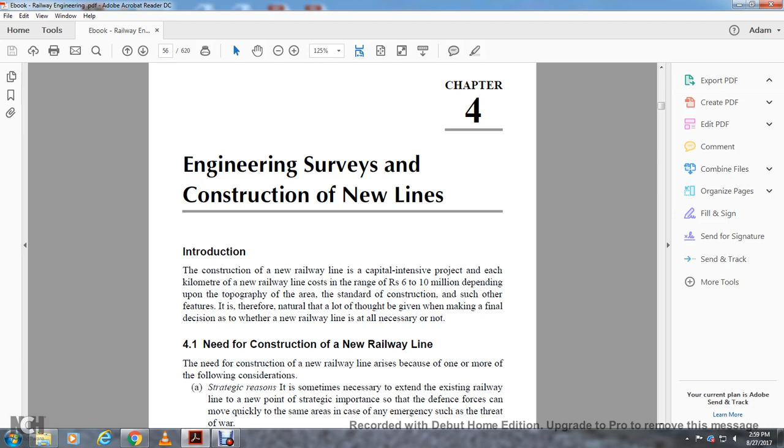All right, Chapter 4, Engineering Surveys and the Construction of New Lines. Introduction. The construction of a new railway line is capital intensive. The project cost per kilometer of new railway lines is in the range of 6 to 10 million, depending on the topographical area, the standard of construction, and other features. Therefore, a thorough study should be made before the final decision on whether the new railway line is necessary or not.

Need for the construction of a new railway line. The need for the construction of a new railway line arises because of one or more of the following considerations. Strategic reasons: sometimes it's necessary to extend the existing railway line to new points of strategic importance so the defense forces can move quickly to that area in case of emergency, such as the threat of war. Political reasons: a new line sometimes becomes necessary to serve the political needs of the country, for example, the Pathankot–Jammu railway line.

Developing backward areas: sometimes the construction develops backward areas, as experience has shown that backward areas with railway communication available always develop very fast. The Assam railway link can be classified in this category. To connect new trade centers: some new trade centers are connected with railway lines to quicken the transportation of goods from the point of production to the point of consumption.

Shortening of existing railway links: the existing routes between two important points may be longer, so new railway lines are constructed on the shorter line. In such a case, the short route is not only economical but also helps with the faster movement of goods and passengers. The Konkan Railway is a typical example.

Doubling of the existing single railway line has been done in a few cases to meet the additional requirement of traffic. Recently, a large number of projects have also been undertaken for converting existing meter gauge sections into broad gauge lines in order to have a uniform gauge for the smooth flow of traffic.

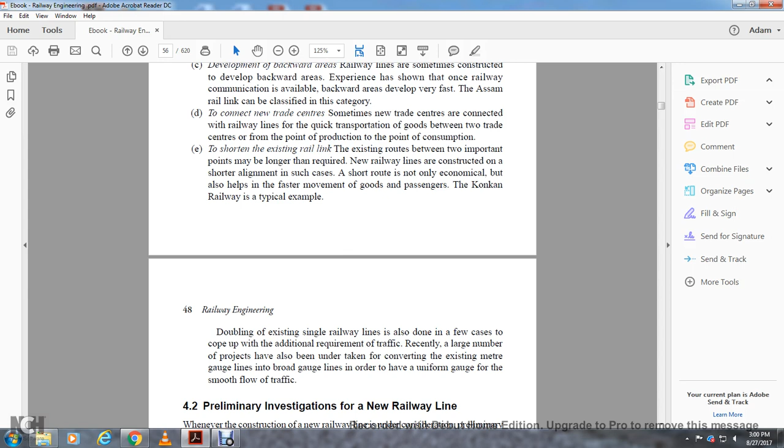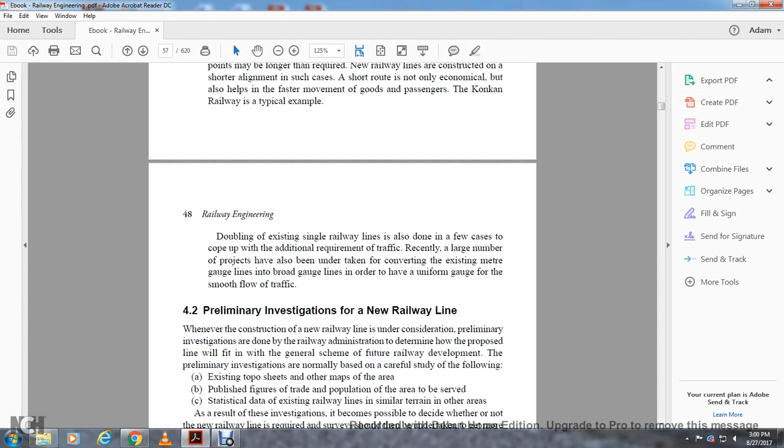4.2, the preliminary investigation of a new railway line. Whenever the construction of a new railway line is under consideration, a preliminary investigation is done by the railway administration to determine how the proposed line will fit in the general scheme of future railway development. The preliminary investigation is normally based on a careful study of existing topo sheets, other maps of the area, the published figures of trade and population of the area to be served, the statistical data of existing railway lines, and similar terrain in other areas. As a result of these investigations it becomes possible to decide whether or not the new railway line is required and what surveys should be undertaken to get more detail.

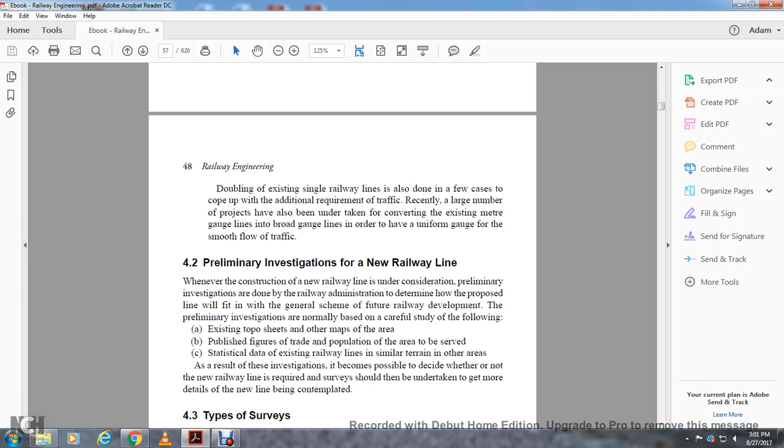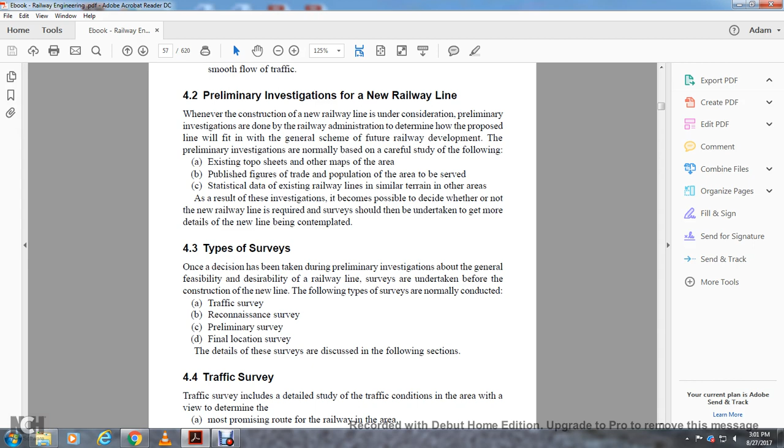4.3, types of surveys. One of the decisions taken during the preliminary investigation is about the general feasibility and desirability of the railway line, and the surveys to be undertaken before the construction of the new line. The following types of surveys are normally conducted: traffic survey, reconnaissance survey, preliminary survey, and final location survey. The details of these surveys are discussed in the following section.

4.4, the traffic survey. The traffic survey includes the details of the traffic conditions in the area with a view to determine the most promising route for the railway in the area, the possible traffic the railway line will carry, and the standard of the railway line to be followed. Traffic surveys are normally undertaken in conjunction with the reconnaissance and preliminary engineering surveys, so the technical feasibility, relative costs, and alternate proposals can be formulated.

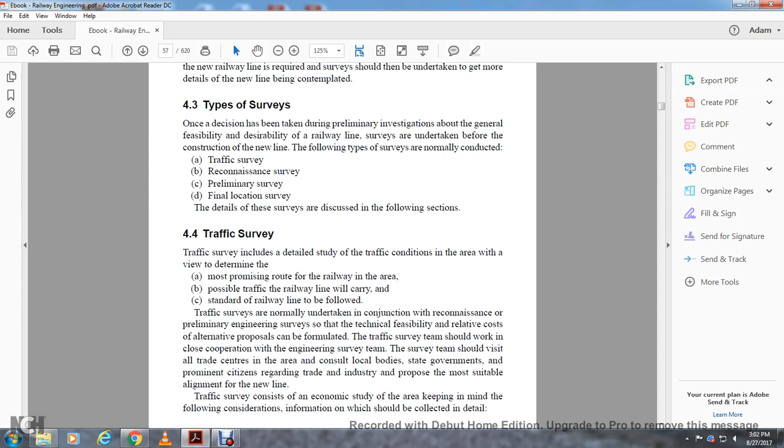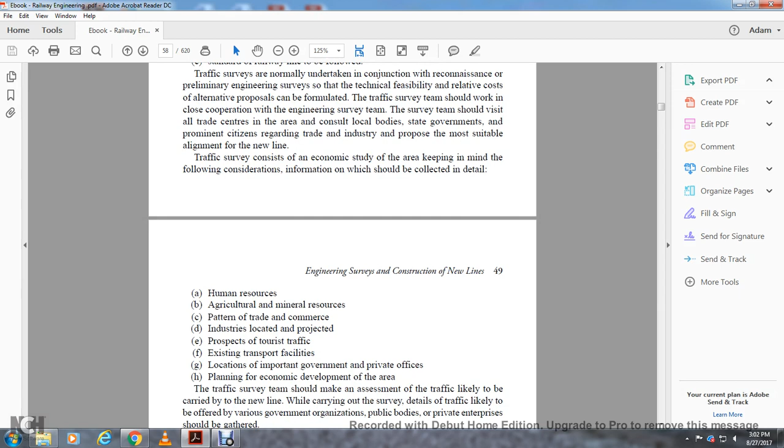The traffic survey team should work in close cooperation with the engineering survey team. The survey team should review all trade centers in the area and consult local bodies, the government, and prominent citizens regarding trade and industry and the most suitable alignment for the new line. The traffic survey consists of an economic study keeping in mind the following considerations, information on which will be collected in detail: human resources, agricultural and mineral resources, trade, commerce, and industry located in the project area, prospects of traffic, tourist traffic, existing transportation facilities, the location of important government and private offices, and planning for economic development of the area.

The traffic survey should make an assessment of the traffic likely to be carried by the new line. While carrying out the survey, details of the traffic likely to be offered by various government organizations, public bodies, and private enterprises should be gathered. At the end of the survey, a report should be formulated.

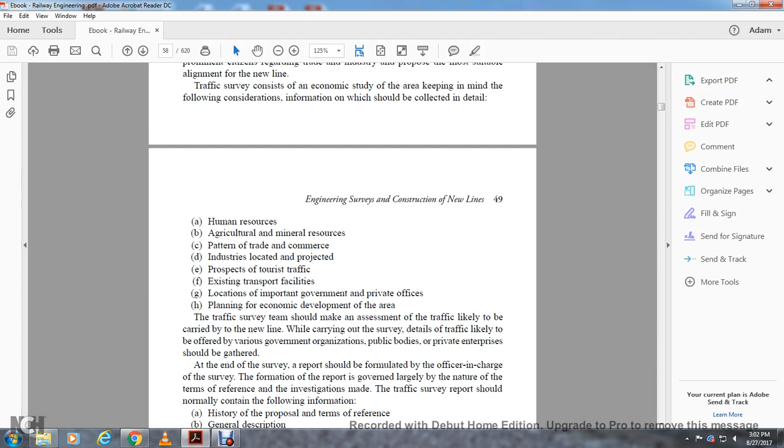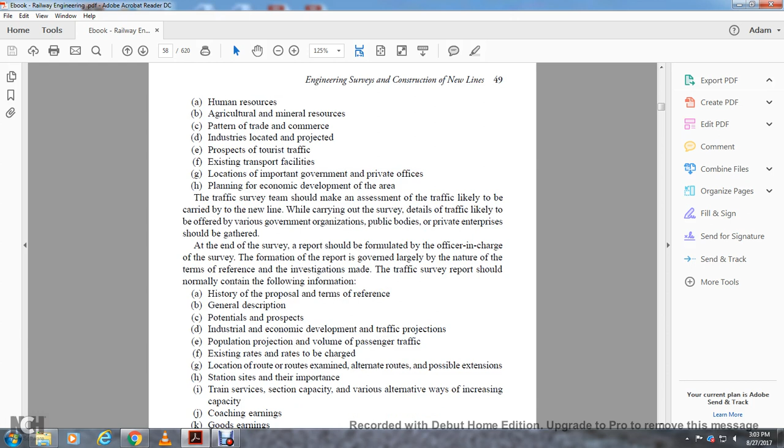The officer in charge for the formation of the report is governed largely by the nature of the terms of reference of the investigation made. The traffic survey report should normally contain the following information: history, proposed terms of reference, general description, potential prospects of industrial and economic development, traffic projections, population projection, volume of passenger traffic,

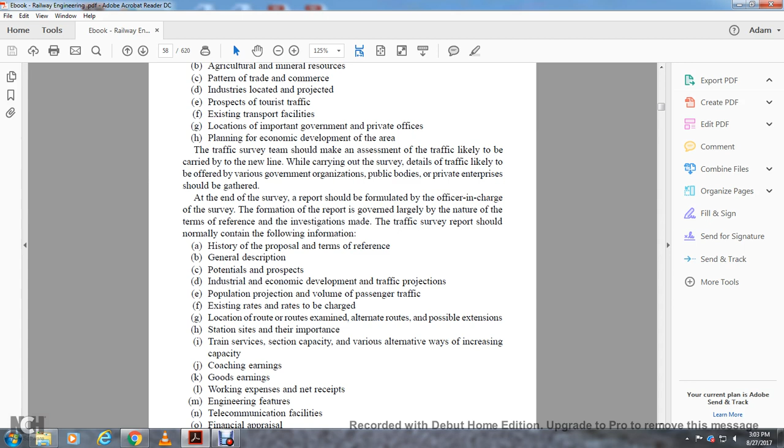existing rates and rates to be charged, location of the routes and routes examined, alternate routes and possible extensions, station sites, importance in the train services and section capacity, various alternative ways of increasing coaching earnings, goods earnings, working expenses, net receipts, engineering features, telecommunication facilities, financial appraisal, and the conclusion and recommendation.

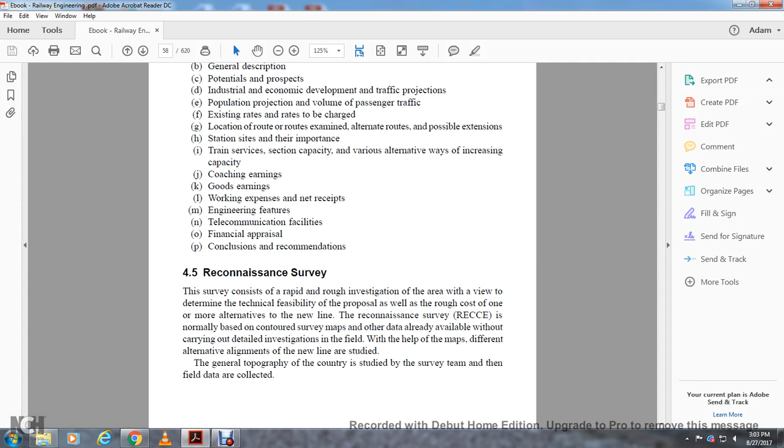Reconnaissance survey. This survey consists of a rapid investigation of the area with a view to determine the technical feasibility of the possible proposal, as well as a rough cost of one or more alternatives for the new line. The reconnaissance survey is normally based on the contour survey maps already available, without carrying out detailed investigation in the field. With the help of the map, the different alternative alignments of the new line are studied. The general topography of the country is studied, and the survey team collects the field data.

4.5.1 Survey instruments. The reconnaissance survey is mostly conducted using survey instruments rapidly measuring the approximate distances and heights. The survey instruments used are the following: the prismatic compass for the magnetic bearing of the proposed alignment, the aneroid barometer for the relative height of the various points, the Abney level and hand level, the clinometer for measuring gradients and angles of slope, binoculars for viewing physical features, and a pedometer to record the total length traveled while walking.

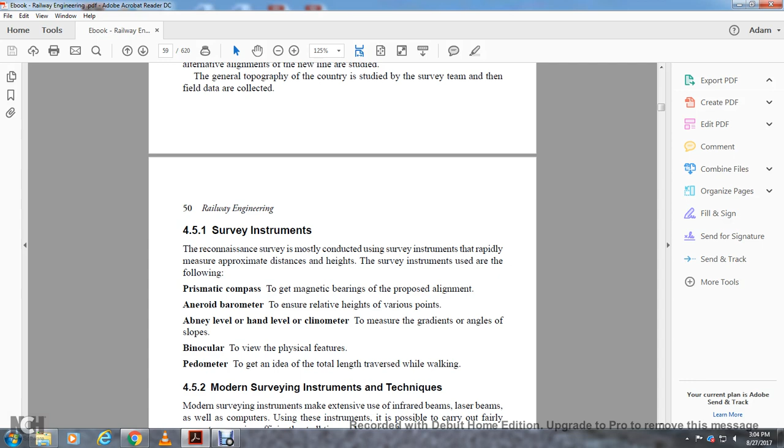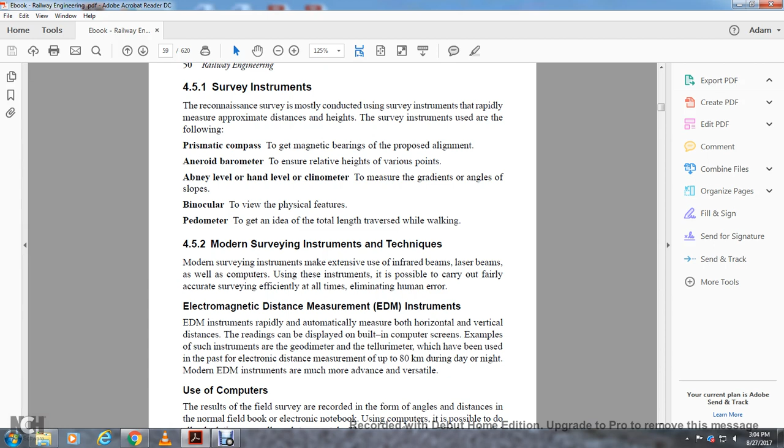4.5.2 Modern surveying instrument techniques. With modern survey instruments making use of infrared beams, laser beams, as well as computers, it is possible to carry out fairly accurate surveying efficiently at all times, eliminating human error. Electromagnetic distance measurement instrument. The EDM instrument rapidly and automatically measures both the horizontal and vertical distance, with readings displayed on the screen. Examples of such instruments are the geodimeter and the tellurometer, which have been used in the past, measuring distances up to 80 kilometers during the day and the night. Modern electromagnetic distance measurement is much more advanced and versatile.

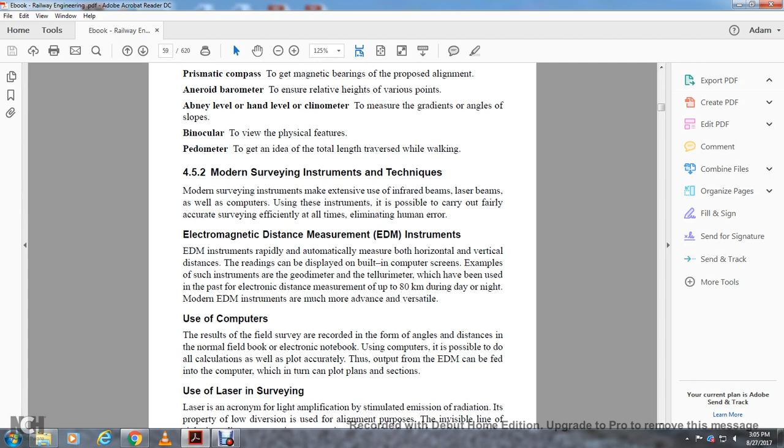Use of computers. The results of the field survey are recorded in the form of angles and distances in a normal field book or electronic notebook. Using computers, it is possible to do all the calculations as well as the plotting accurately. The output from the electronic distance measurement can be fed into the computer, which can then plot plans and sections.

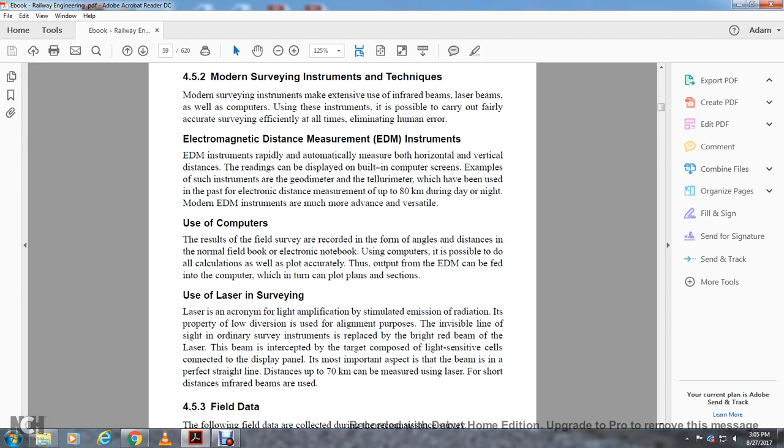Using lasers in survey. Laser is an acronym for light amplification by stimulated emission of radiation. Its property of low divergence is used for alignment purposes The invisible line of sight in the ordinary survey instrument is replaced with the bright red beam of the laser. The beam is intercepted by a target composed of light-sensitive cells connected with a display panel. The most important aspect of the beam is that it is a perfect straight line. Distances up to 70 kilometers can be measured using a laser; for short distances, infrared beams are used.

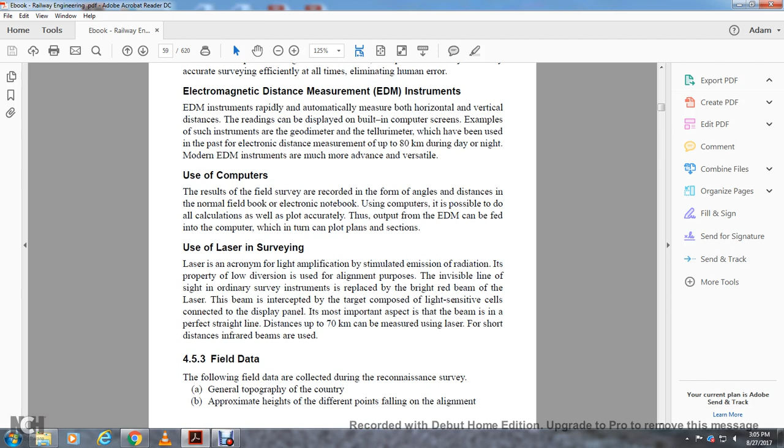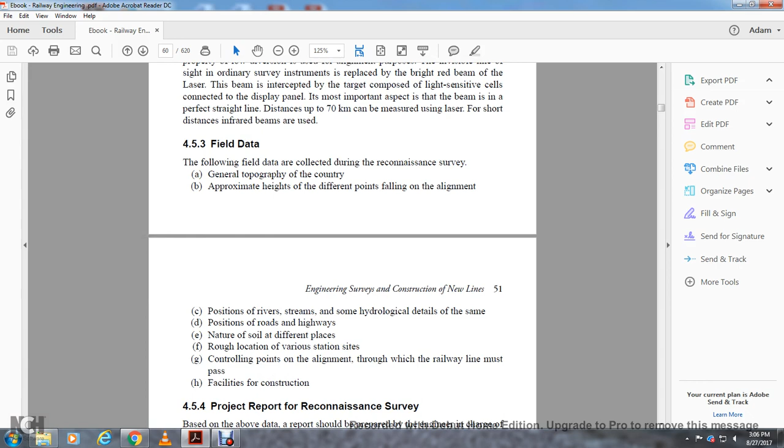4.5.4 The project report of the reconnaissance survey. Based on the above data, the report should be prepared by the engineer in charge of the project, bringing out clearly from the financial point of view whether or not the prospects of the alignment surveyed make it worthwhile to undertake further investigation to construct the line. The project report should be accompanied by an abstract estimate of the cost of the line. The report and estimate should be accompanied by a map of the area at a scale of 20 kilometers to 1 centimeter, and an index map of 2.5 kilometers to 1 centimeter.

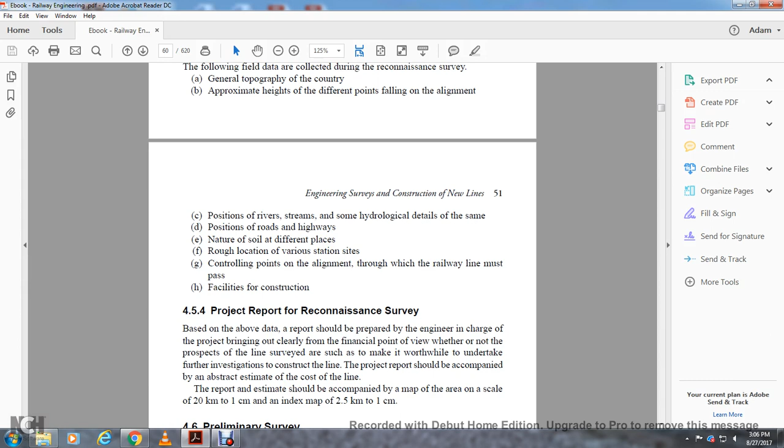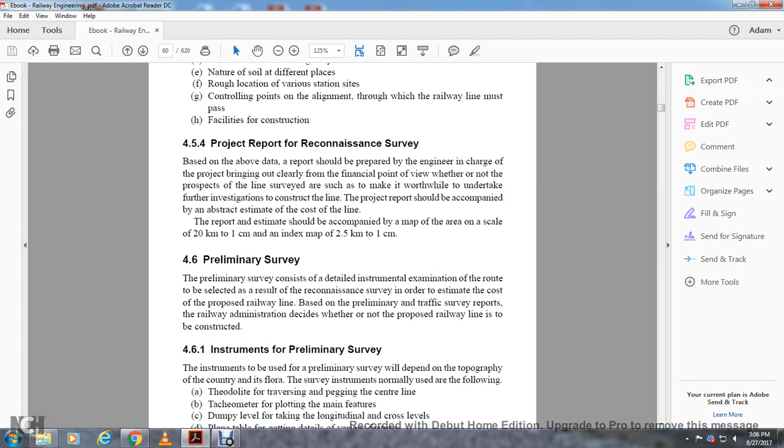The preliminary survey. The preliminary survey consists of a detailed examination of the route selected as a result of the reconnaissance survey, in order to estimate the cost of the proposed railway line. Based on the preliminary and traffic survey reports, the railway administration decides whether or not the proposed railway line is to be constructed.

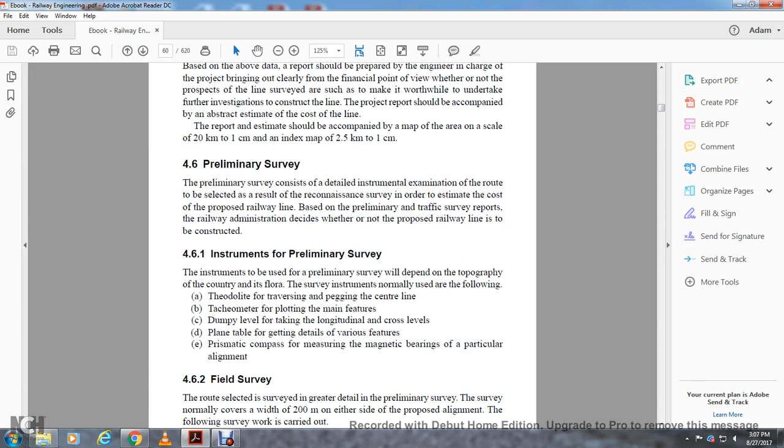4.6.1 Instruments for the preliminary survey. The instruments used for the preliminary survey depend on the topography of the country and its flora. The instruments normally used are the following: the theodolite for traversing and pegging the center line, the tacheometer for plotting the main features, the dumpy level for taking longitudinal and cross levels, the plane table for getting the details of various features, and the prismatic compass for measuring the magnetic bearing of a particular alignment.

4.6.2 The field survey: the route selected is surveyed in greater detail in the preliminary survey. The survey normally covers a width of 200 meters to either side of the proposed alignment. The following survey is carried out.

An open traverse is run along the center line of the proposed alignment with the help of a theodolite, tacheometer, or compass and chain, cross-leveling the proposed route within a width of 200 meters to either side, in order to make an accurate contour map.

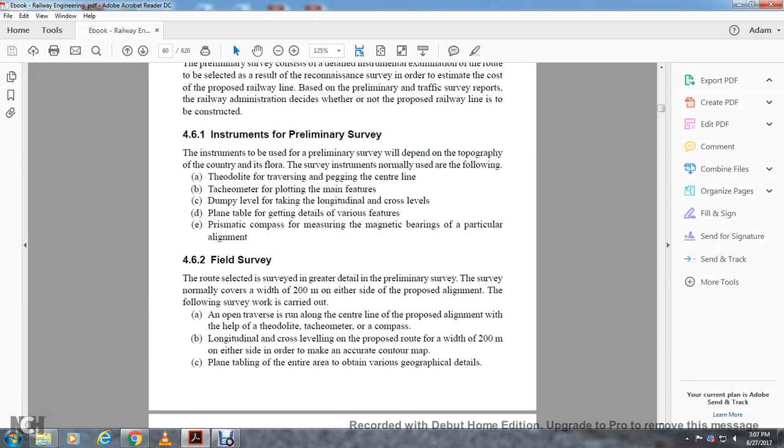Plane table the entire area to obtain the various geographical details. Special survey is done at station sites, level crossings, and bridges using a plane table.

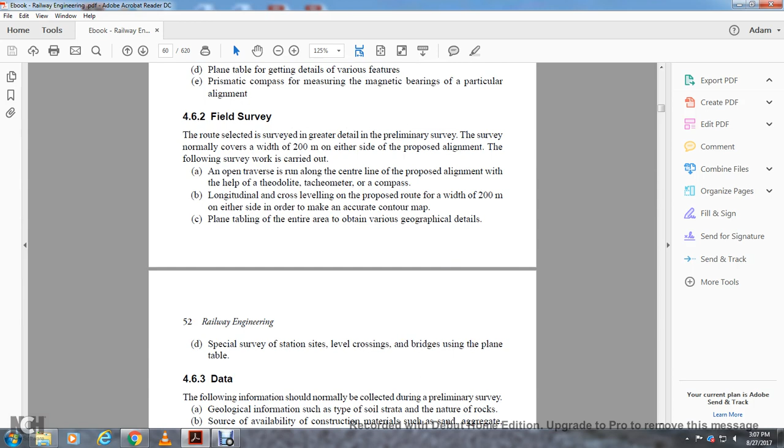463. The following information should normally be collected during the preliminary survey: geological information such as the type of soil and strata, the nature of the rock, source available for construction materials such as sand, aggregate, brick, cement, and timber, and facilities for construction such as availability of labor and drinking water.

Full details for the land and buildings required, details of existing bridges and culverts, along with information on proximity to tanks, bunds etc. which may affect the design of the bridge, and details of road crossings along with the angle of crossing.

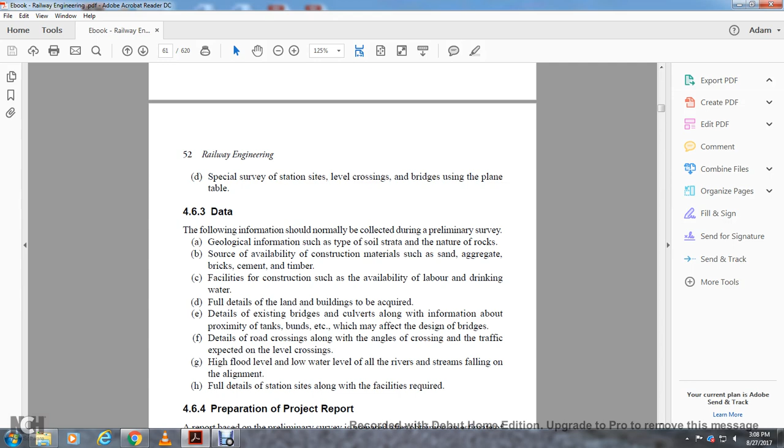Traffic expected on the level crossings, high flood level, low water level of all rivers, streams falling on the alignment and full details of stations along with facilities required.

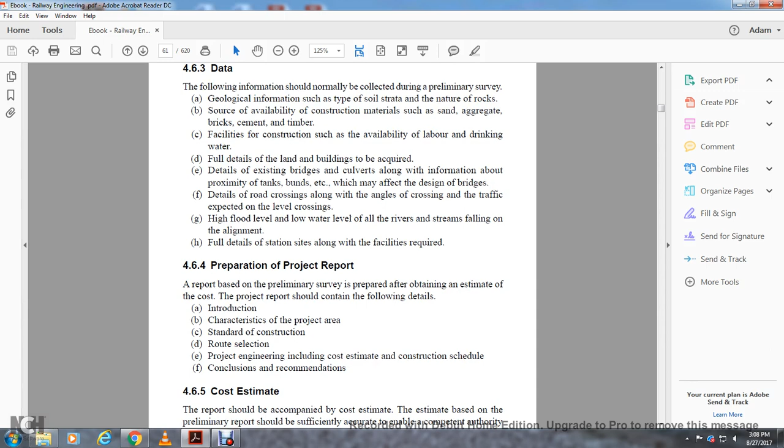464. Preparation of the project report. Reports of the preliminary survey, along with the estimate of cost, should contain the following details: introduction, characteristics of the project area, standard of construction, route selection, project engineering including cost estimate, construction schedule, and conclusion with recommendations.

465. Cost estimate. The report should be accompanied by a cost estimate based on the preliminary survey; this estimate should be sufficiently accurate to enable the competent authority to take a decision regarding construction of the new line.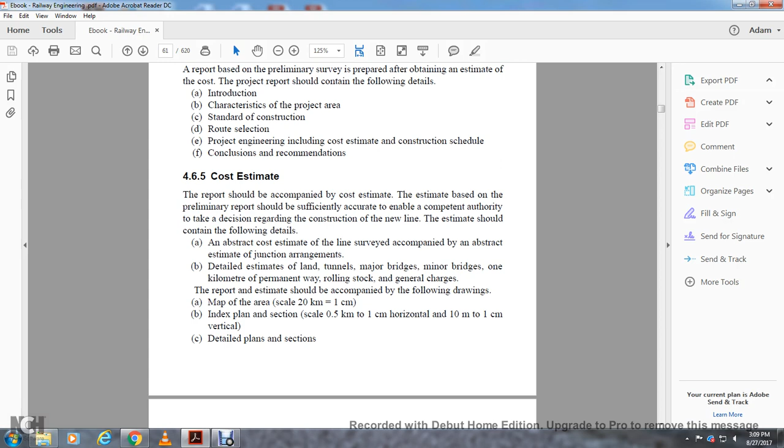The report and estimate should be accompanied by the following drawings: a map of the area at a scale of 20 kilometers to 1 centimeter, an index plan section at half a kilometer to 1 centimeter horizontal and 10 meters to 1 centimeter vertical, detailed plan sections, station yard plans, and junction arrangement plans.

Preliminary engineering cum traffic survey. Quite often the traffic survey and preliminary engineering survey are carried out simultaneously in order to expedite the project. In such cases, a techno-economic survey report is compiled based on the preliminary traffic surveys.

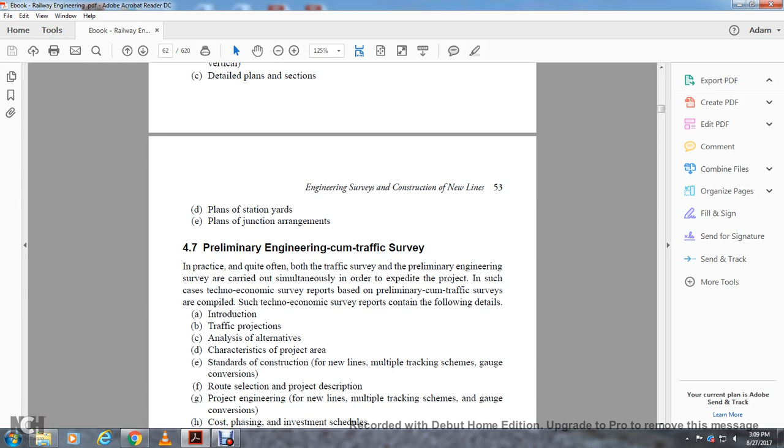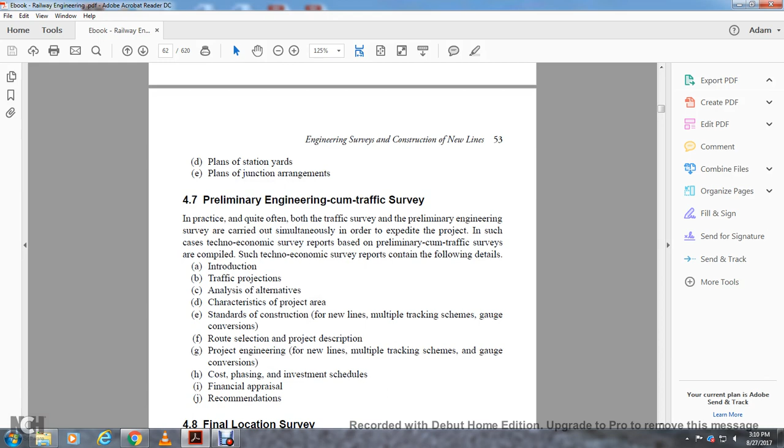Such techno-economic survey reports contain the following details: introduction, traffic projections, analysis of alternatives, character of the project area, standards of construction for new lines, multiple track schemes or gauge conversion, route selection, project description, project engineering for new lines, multiple track schemes, gauge conversion, cost phasing, investment scheduling, financial appraisal, and recommendations.

4.8. Final location survey. Once a decision has been made to construct a particular railway line, the final location survey is done with instruments generally the same as in the case of the preliminary survey.

The final location survey is done for preparing the work details most accurately, along with the cost estimate. In certain cases the principal difference between the preliminary survey and the final survey is as follows.

In the final location survey, the alignment is fully staked with the help of a theodolite, whereas this is not obligatory in the case of the preliminary survey.

In the final location survey, a more detailed project report is prepared and submitted, and all working drawings are prepared.

The following tasks are carried out in the final location survey: the center line is fully marked with pegs at 20 meters, with at least one large peg used every 100 meters. Masonry pillars are built at the tangent points of the curve, along with the center line, at intervals of 500 meters.

The longitudinal and cross levelling of the alignment establishes the final gradient of the alignment, and all gradients are compensated for curves. The site of the station is fully demarcated in the final location survey.

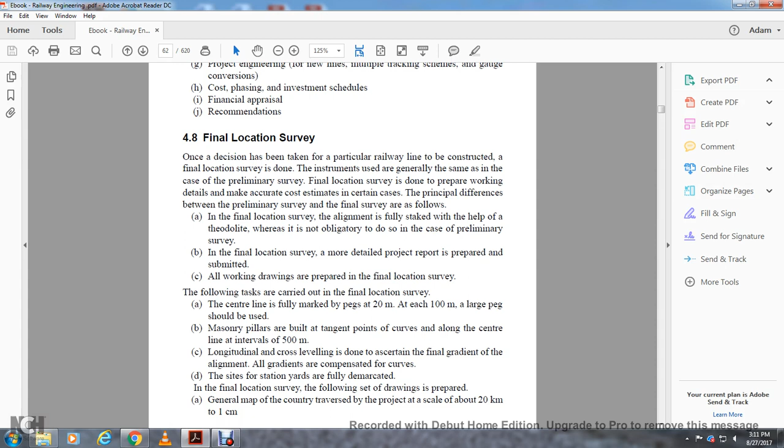The following set of drawings are prepared: a general map of the country traversed by the project at a scale of 20 kilometers to 1 centimeter, and an index map at a scale of 2.5 kilometers to 1 centimeter.

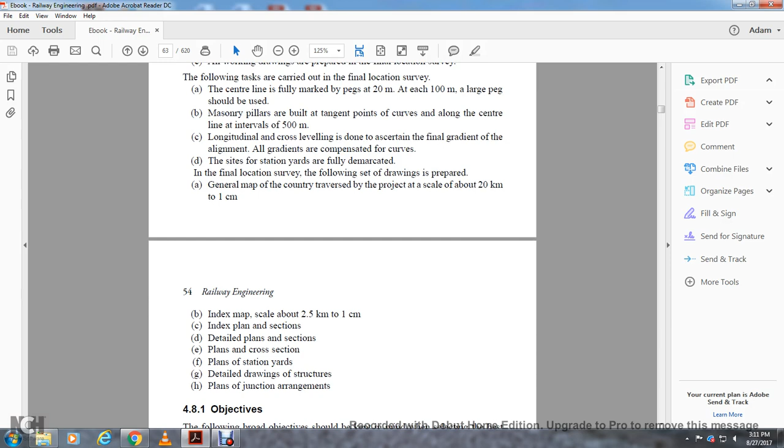The index plan with the section detailed plan sections, plans and cross sections, plans of the station yard, detailed drawings of structures, plans of the junction arrangements.

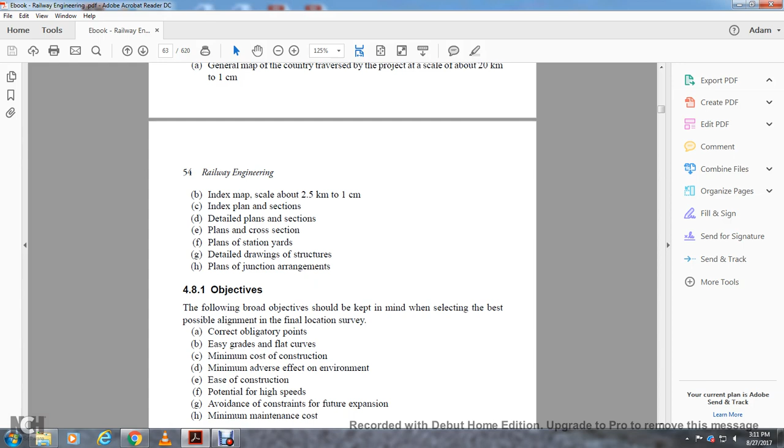The broad objective to be kept in mind when selecting the best possible alignment for the final location: correct obligatory points, easy grade with flat curves, minimum cost of construction, minimum adverse effect on the environment, ease of construction, potential for high speed, avoidance of constraints for future expansion and maintenance, and minimum maintenance cost.

The final project report is prepared based on the final location survey. The report consists of the following: an introduction segment of the report.

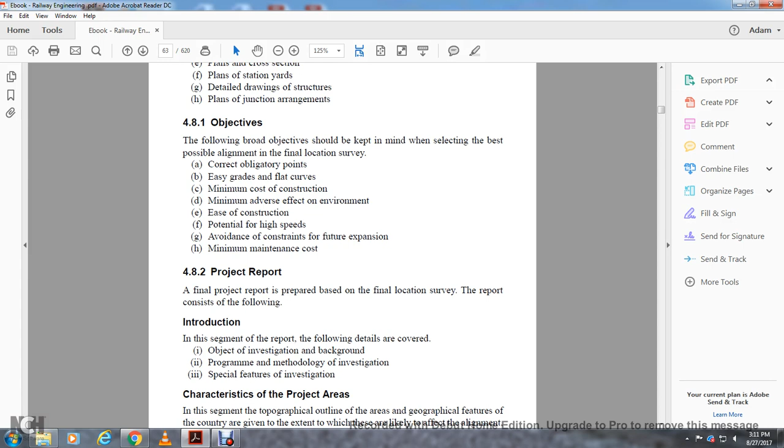Following details are covered: the object of investigation, and background, program methodology, investigation, special features of investigation, characteristics of the project area.

The topographical outline of the area with the geographical features of the country is given, with the extent to which they are likely to affect the alignment, probable stability of the line and cost of construction work, prospects for the future of the proposed line, with climatic and rainfall characteristics, environmental characteristics such as corrosion factors and pollution, which may affect the design and maintenance of structures and bridges, are also brought out.

The category of the line may indicate speed potential for the line, with maximum axle load, design standard of the bridge as basis for adopting the same, ruling gradient adopted as basis for selection, and the sharpest degree of curve adopted as basis for the project and speed compatible with the category of the line.

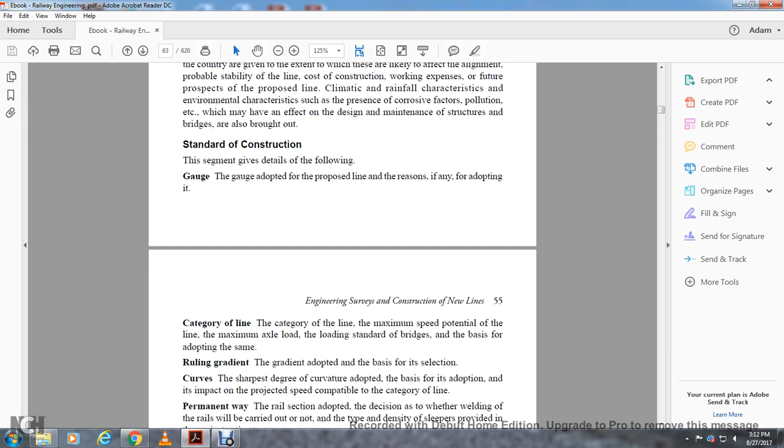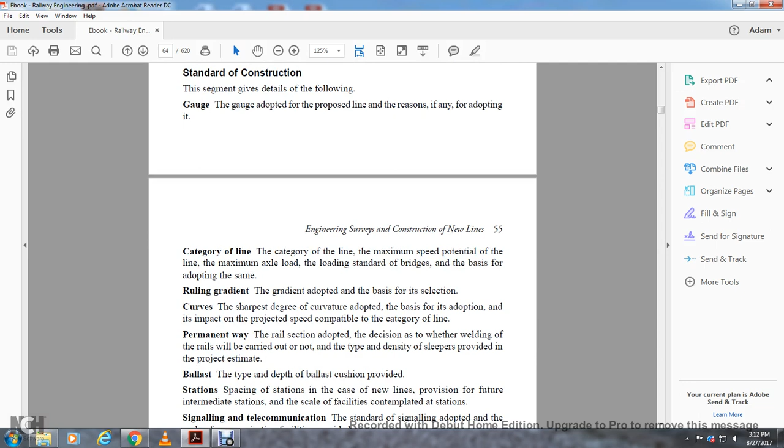Permanent way: the rail section adopted, decision on whether welding of rails will be carried out, type and density of sleepers provided as per project estimate, type and depth of ballast cushion provided.

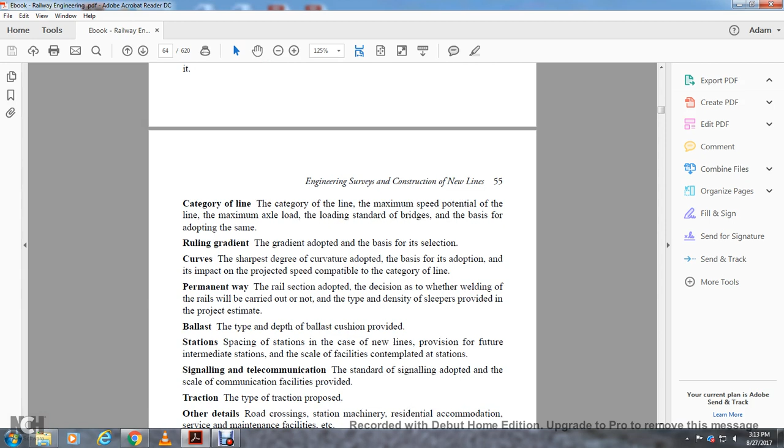Station spacing provided for new lines, provision for future and intermediate stations with scale of facilities contemplated at stations, signaling and telecommunication standards adopted, scale of communication facilities provided, type of traction proposed, and other details such as road crossings, station machinery, residential accommodation, services and maintenance, etc.

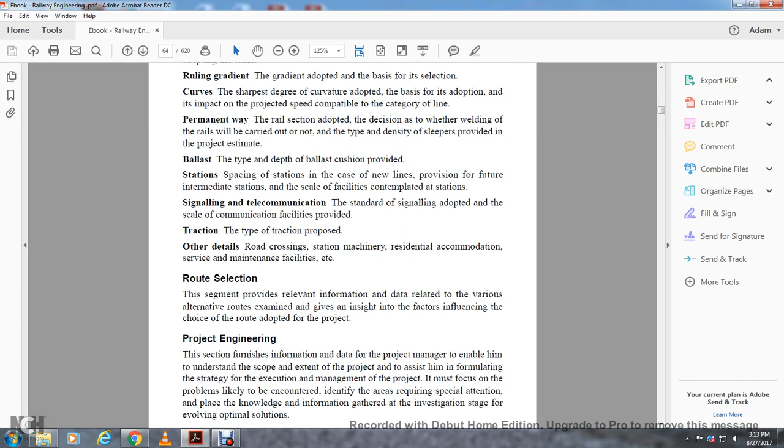The route selection section provides relevant data on the various alternative routes examined, and gives the factors influencing the choice of route adopted for the project.

The project engineering section furnishes information and data for the project manager, helping to understand the scope of the execution of the project.

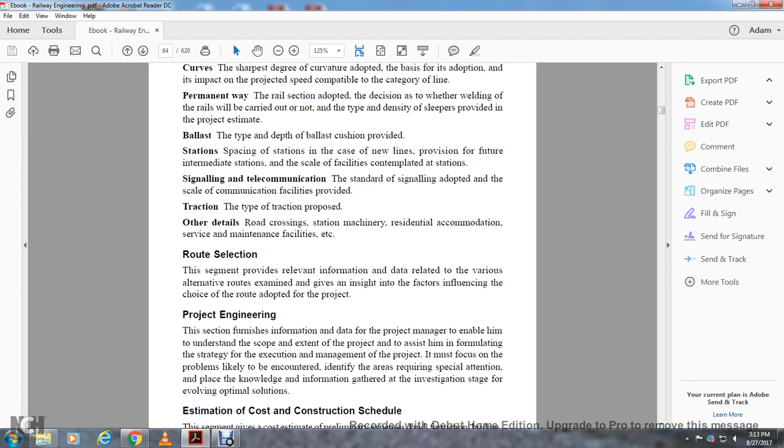The strategy for the execution and management of the project must focus on problems likely to be encountered, identifying areas requiring special attention, and applying the knowledge and information gathered during the investigation stage to evolve an optimal solution.

Estimating cost and construction schedule: this segment gives the preliminary cost estimate covering land, formation, bridges, permanent way, station buildings, residential quarters, road crossings, station equipment, signal and interlocking, rolling stock, etc. The schedule of construction as well as the investment is also given.

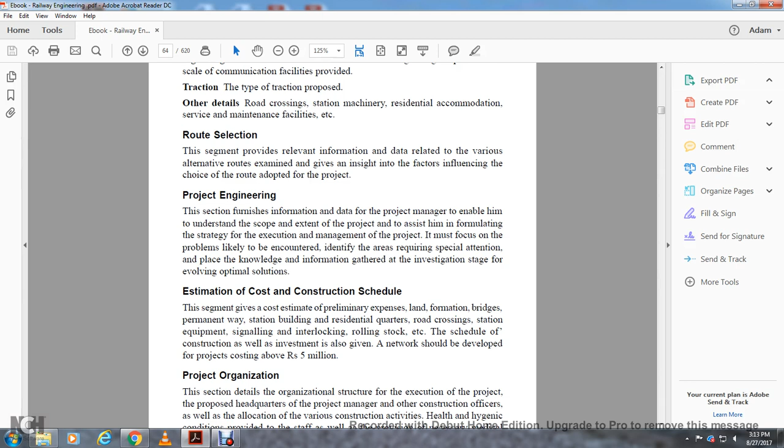The network shall be developed at a project cost of above Rs 5 million. The project organization section details the objectives and organizational structure for execution of the project, proposed for the headquarters project manager and other construction officers, as well as allocation of various construction activities.

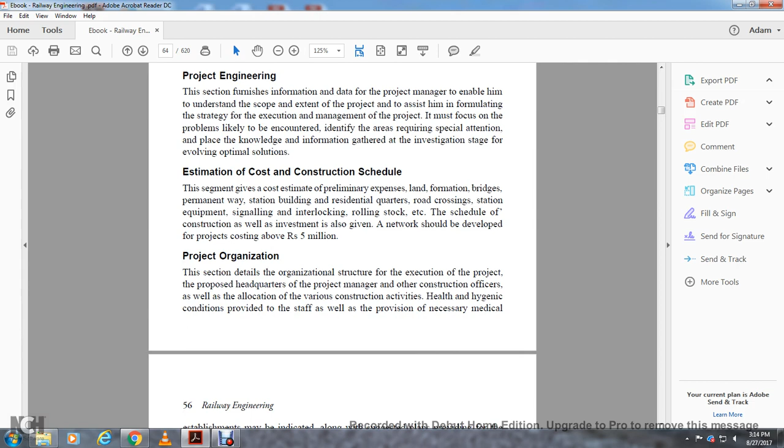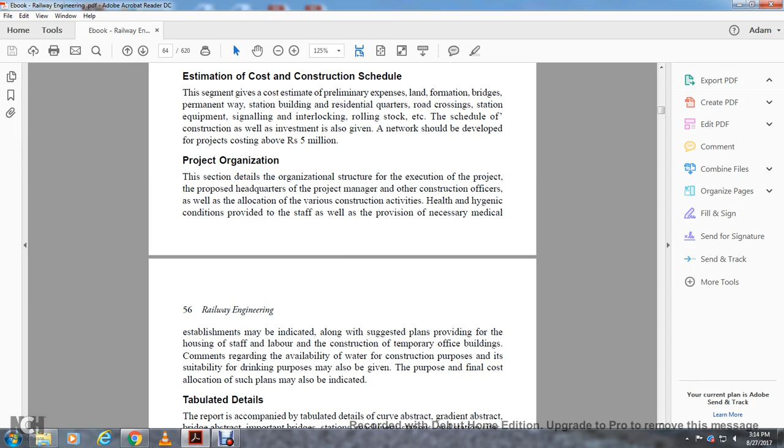Health and hygienic conditions provided for staff, as well as provision of necessary medical establishments, are indicated along with suggested plans for housing of staff and labor, construction of temporary office buildings, and comments regarding availability of water for construction purposes and suitability for drinking. The cost allocation for such plans may also be indicated.

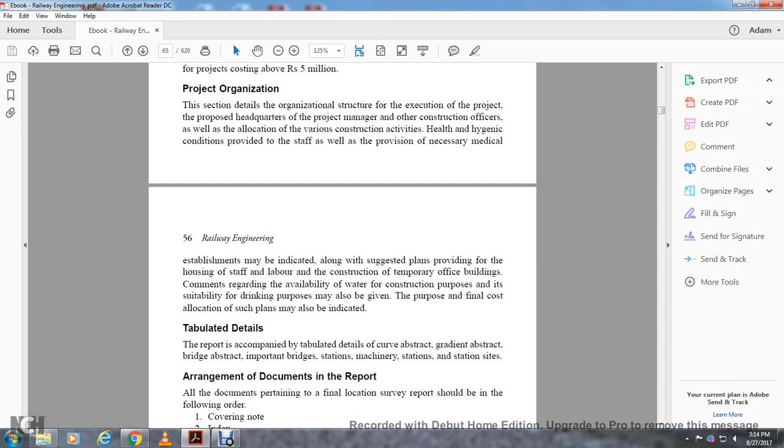Tabulated details: the report is accompanied by tabulated details including the curve and structure abstract, gradient abstract, bridge abstract, details of important bridges, and station machinery, stations, and station sites.

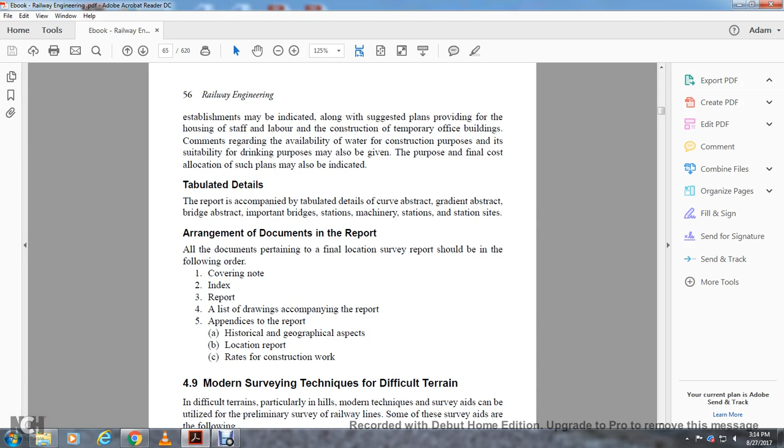Arrangement of documentation and report: all documents pertaining to the final location survey report shall be in the following order: covering note, index of report, list of drawings accompanying the report, appendices to the report covering historical and geographical aspects, location report, and rates of construction work.

Section 4.9: modern survey techniques for difficult terrain. In difficult terrains, particularly hilly areas, modern survey aids are utilized for the preliminary survey of the railway line.

Some of these survey aids are the following: satellite imagery with remote sensing data, aerial photographs, topographical maps and contour maps, digital terrain modelling, and photogrammetrically plotted sheets.

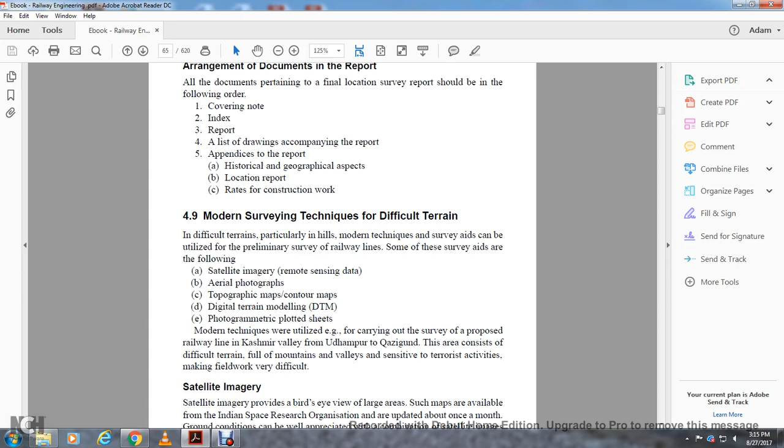Modern technology was utilized to carry out the survey proposed for the railway line in the Kashmir Valley, from Udhampur to Qazigund. This area is considered difficult terrain, full of mountains and valleys, sensitive to terrorist activities, making field work very difficult.

Satellite imagery provides a bird's eye view of large areas. Such maps are available with the Indian Space Research Organization, updated monthly with ground conditions. With the combination of satellite images and topographical maps, 2 or 3 promising alternative corridors can be identified.

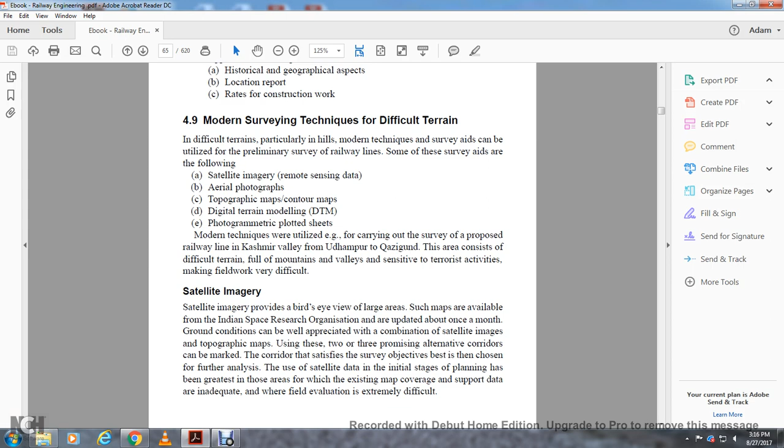The corridor has satisfied the survey objective for the selection, based on further analysis of the satellite data. This initial stage of planning is greatest in areas where existing map coverage or supporting data is inadequate, and where field evaluation is extremely difficult.

Aerial photographs of the entire country, taken once every 3 to 5 years, are made available by the Survey of India. These photographs are used to gather further detail for the corridor. A critical examination of the corridor, based on the finalized photographs, helps determine river crossings, tunnel locations, station sites, etc.

Digital terrain modeling: further details of the railway line are worked out with the help of digital terrain modeling contour maps. Computer aids are used for defining the most economical alignment. Ground stations are fixed in the form of two mutually visible points about a kilometre apart in a 10-km stretch.

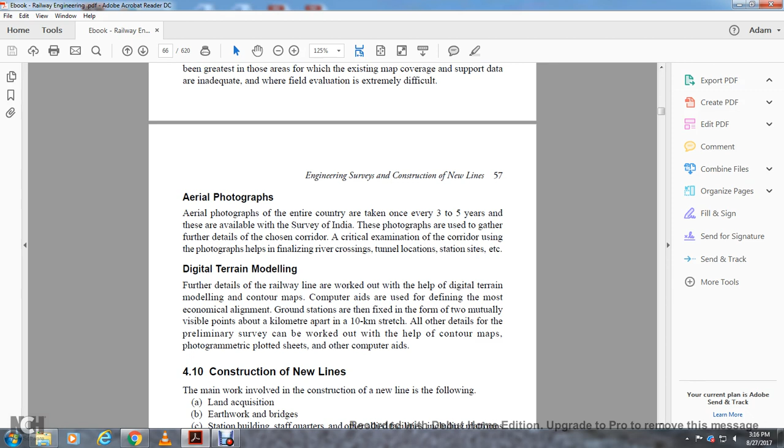The details from these preliminary surveys can be worked out with the help of contour maps, photogrammetric plotted sheets, and other computer aids.

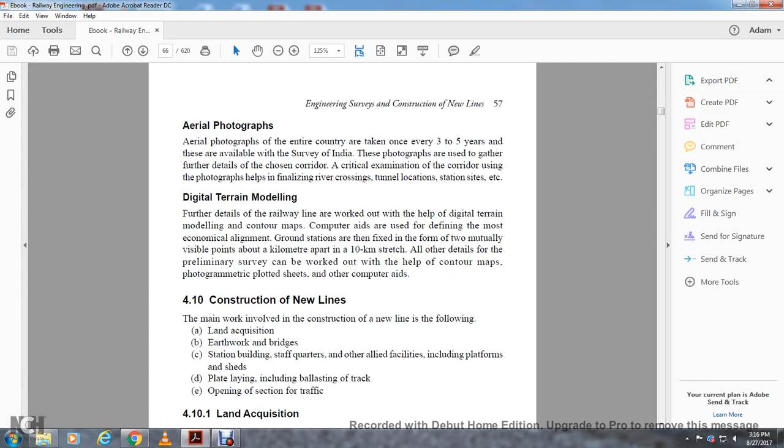4.10 Construction of new lines. The main work involved in the construction of a new line is as follows: land acquisition, earthwork, bridges, station buildings, staff quarters, and other allied facilities including platforms and sheds, plate laying including ballasting of the track, and opening the section to traffic.

4.10.1 Land acquisition. The work of land acquisition should start well in advance so that legal formalities are completed on time, and possession of the land can be taken by the start of construction. The work of land acquisition is done with the help of the state government, following the procedure laid down for land acquisition.

Normally, Sections 4 and 6 of the Land Acquisition Act are applied for acquisition of land in India. Land is generally acquired after giving notice and paying compensation to the previous occupant. In case of emergency, land can be acquired urgently by invoking special sections, Section 9 and 17, of the Land Acquisition Act of India.

Land that has been acquired should be adequate, for the formation, berm, and borrow pits, and should also have adequate provision for future expansion. Even when a single line is to be constructed, the land available should be sufficient for construction of a double line for future expansion.

Normally, a strip of 25 to 35 meters of land is required for construction of the railway line, with extra width required at station yards. For a small station, this is normally adapted to about 150 by 1,000 meters of minimum land, aligned to conform to certain requirements.

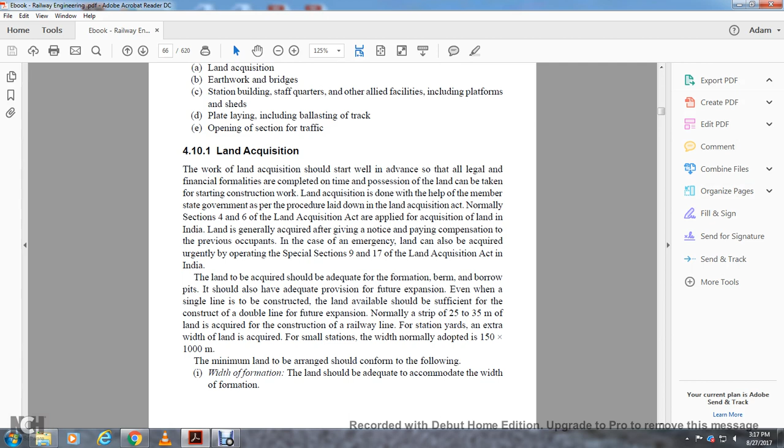The width of formation land should be acquired to accommodate the width of the formation and side slope. The side slope depends on the nature of the soil, and is normally taken as 2 to 1, horizontal to vertical.

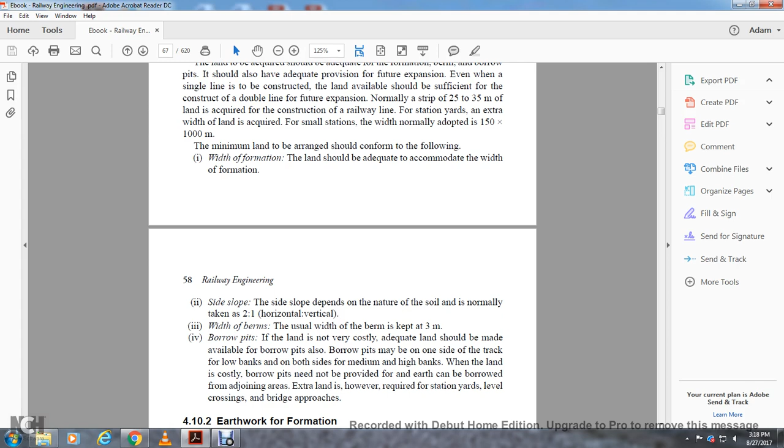The width of the berm is usually kept at 3 meters. If land for borrow pits is not very costly, adequate land should be made available for them. Borrow pits may be provided on one side of the track for low banks, and on both sides for medium and high banks. When land is costly, borrow pits need not be provided, and earth may instead be borrowed from adjoining areas, such as extra land required for station yards, level crossing, or bridge approaches.

Earthwork for formation. Formation may be in embankment or in cutting depending upon the rail level and the general contour of the area. Formation in embankment is preferred from the point of view of good drainage, but the height of the embankment depends on the high flood level of the area, with a reasonable free board provided above it. The standard width of the formation is given in Table 4.1.

The standard width of the formation of a broad gauge embankment is 6.10 meters for single line and 10.82 meters for double line. For cutting on broad gauge it is 5.4 meters for single line and 10.21 meters for double line. Meter gauge embankment is 4.88 meters single line and 8.84 meters double line. Meter gauge cutting is 4.27 meters single line and 8.23 meters double line.

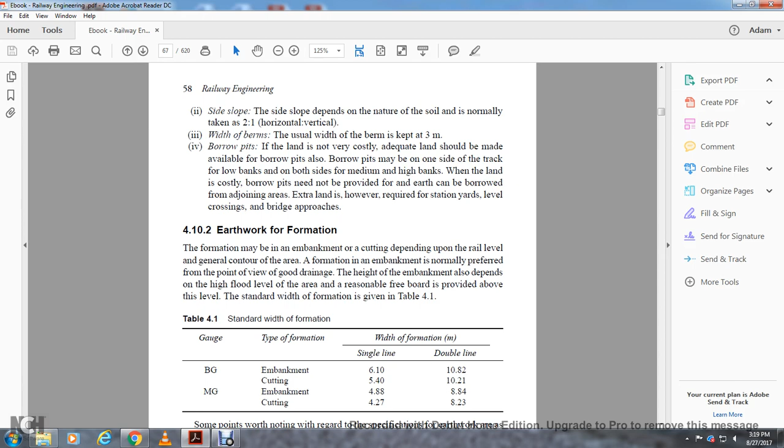All right, some of the points worth noting with regard to the specification for earthwork are as follows. The earthwork is normally done in layers of soil 30 centimeters deep, each well compacted. Mechanical compaction is normally done after each layer with the help of a sheep foot roller, obtaining 90% of the maximum dry density at the optimum moisture content. A shrinkage allowance of 5% is made in the final cross section for consolidation in the case of mechanical compaction. For other types of compaction, the shrinkage allowance is 10%.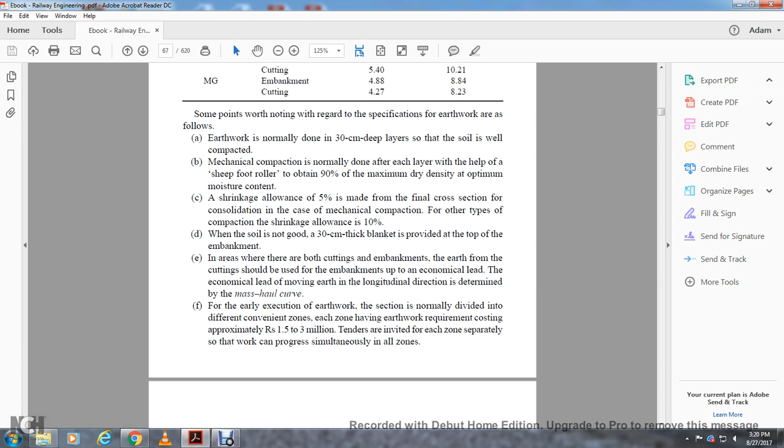If the soil is not good, a 30 centimeter thick blanket is provided at the top of the embankment. The earth from the cutting should be used for the embankment within the economical lead. The economical lead for moving earth in the longitudinal direction is determined by the mass haul curve. For early execution of earthwork, the section is normally divided into different convenient zones, each zone requiring earthwork costing approximately 1.5 to 3 million. Tenders are invited for each of the zones separately so that the work progresses simultaneously in all zones.

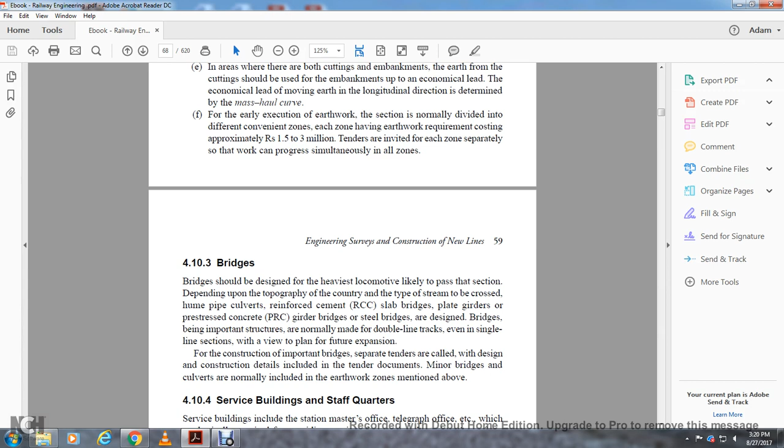10.3 Bridges. Bridges should be designed for the heaviest locomotive likely to pass through the section. Depending on the topography of the country and the type of the stream to be crossed, the bridge may be a hume pipe culvert, reinforced cement concrete slab bridge, plate girder, pre-stressed concrete girder bridge, or steel bridge. Structures of important bridges are normally made for a double line track even on a single line section, in view of future expansion. For important bridges, separate tenders are called with the design and construction details included in the tender documents. Minor bridges and culverts are normally included with the earthwork zones mentioned above.

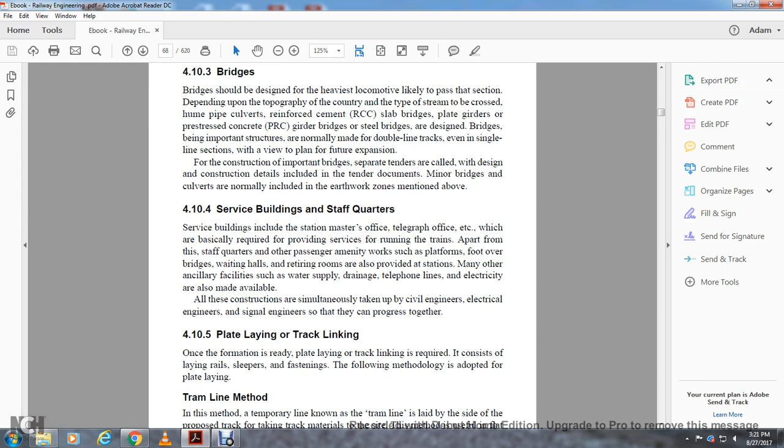All right, 10.4 Service buildings and staff quarters. Service buildings, including the station master's office, the telegraph office, etc., are basically required for providing services for the running of trains. Apart from this, staff quarters and other passenger amenities such as platforms, over bridges, waiting halls and retiring rooms are also provided at the stations, along with many other ancillary facilities such as water supply, drainage, telephone lines and electricity. All the construction is taken up simultaneously by the civil engineer, electrical engineer and signal engineer so they can progress together.

10.5 Plate laying, track linking. Once the formation is ready, plate laying or track linking is required, consisting of laying the rails on the sleepers. The following methods are adopted for plate laying. The tram line method: in this method a temporary line known as the tram line is laid alongside the proposed track for taking the track materials to the site. The method is useful in flat terrain, the tram line following the natural ground, being comparatively easy. The method is, however, seldom used in practice.

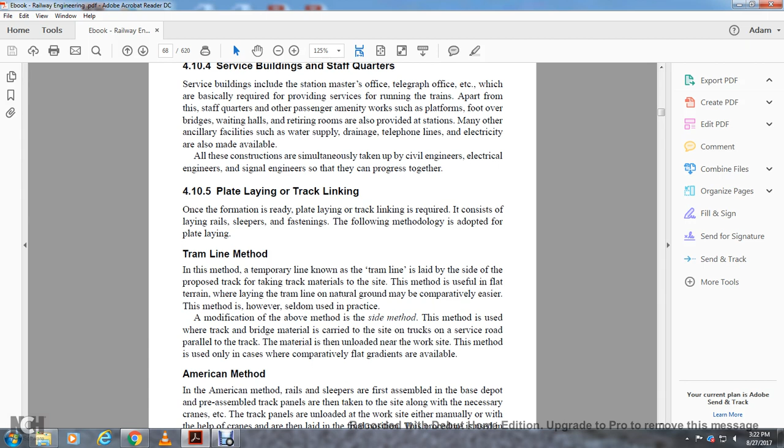The side method: this method is used where the track materials are carried on trucks on a road running parallel to the track, and the materials are unloaded at the work site. The method is used only in cases where comparatively flat gradients are available. In the American method, the rails and sleepers are first assembled in the base depot, and the pre-assembled track panels are taken to the site along with the necessary cranes, etc. The track panels are unloaded at the work site with the help of cranes and laid in final position. The procedure is used mainly in developed countries, particularly where concrete sleepers are laid, since the sleepers are quite heavy and not easy to handle manually.

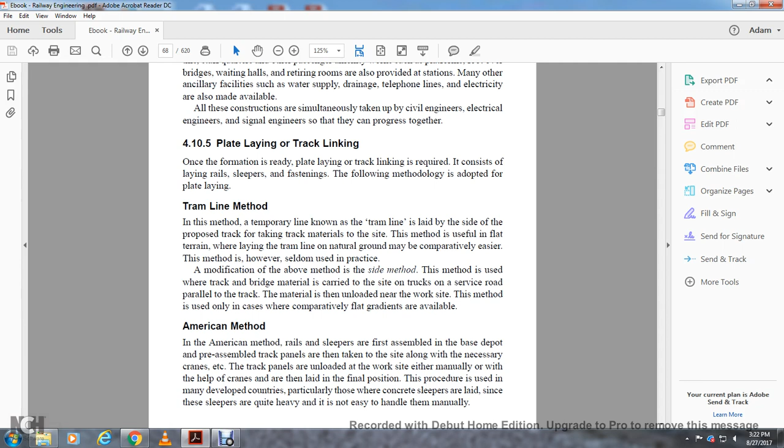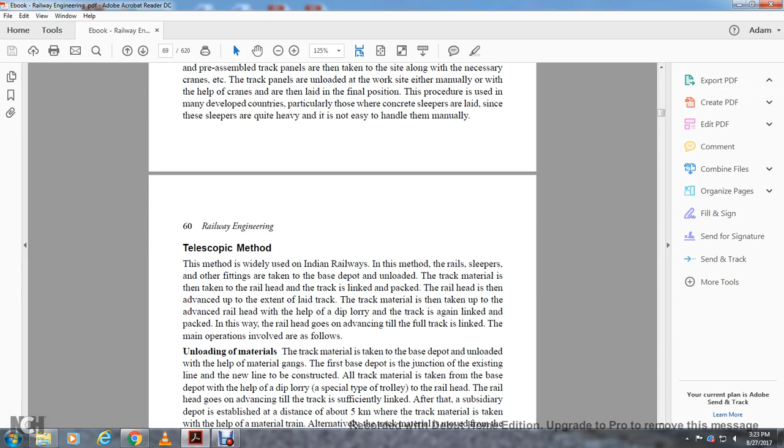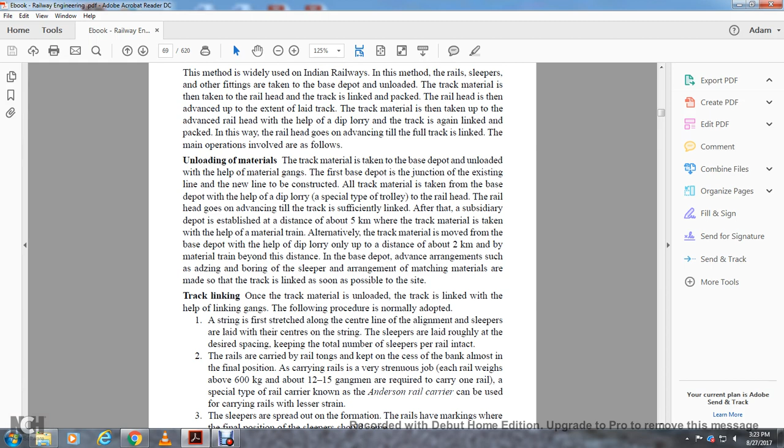After that, a subsidiary depot is established at a distance of about 5 kilometers, where the track material is taken with the help of the material train. Alternatively, the track material is moved from the base depot with the help of the dip lorry only up to a distance of about 2 kilometers, and by material train beyond that distance. In the base depot, advance arrangements such as adzing and boring of the sleepers and matching of materials are made so the track is linked as soon as possible on the site.

Track linking. Once the track materials are unloaded, the track is linked with the help of the linking gang. The following procedure is normally adopted. A string is first stretched along the center line for alignment, and the sleepers are laid along the center line string roughly at the desired spacing, keeping the total number of sleepers per rail intact. The rails are carried with rail tongs and kept on the cess of the bank almost in their final position. Carrying the rail is a very strenuous job. Each rail weighs above 600 kilograms, and about 12 to 15 gangmen are required to carry one rail.

A special type of rail carrier known as the Anderson rail carrier can be used to carry the rails with less strain. Sleepers are spread out over the formation, and the rails are marked with their final position. Small fittings such as fish plates and bolts are placed near the joints, and other fittings required at each sleeper are placed near the end of the sleeper. The rails are then fixed to the sleepers with the help of fittings depending on the type of sleeper. For example, rail screws are used for fixing rails to wooden sleepers. In the case of steel sleepers, rails are fixed with the help of keys, and bearing plates are provided where required and prescribed in the track.

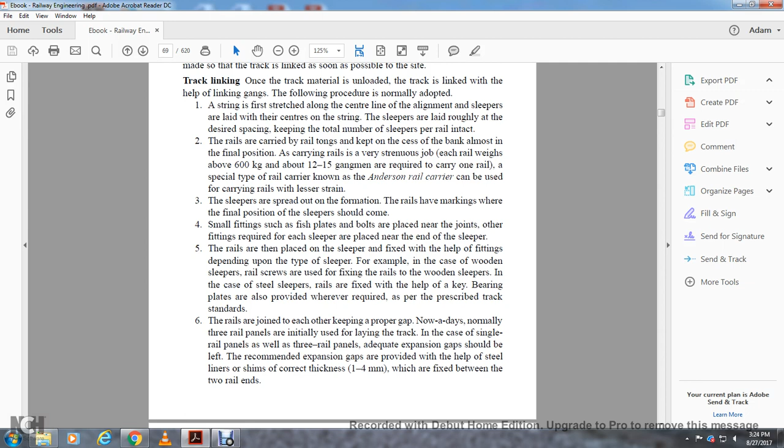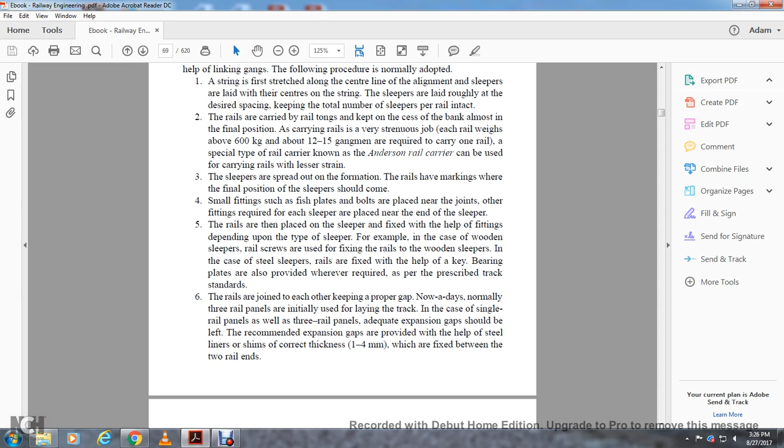The rails are joined to each other keeping the proper gap. Nowadays, three-rail panels are normally used initially for linking the track. In case of single or three-rail panels, adequate expansion gaps should be left. The recommended expansion gaps are provided with the help of steel liners or shims of the correct thickness, which are fixed between the two rail ends. The track is then thoroughly packed by the beaters and the packing gang.

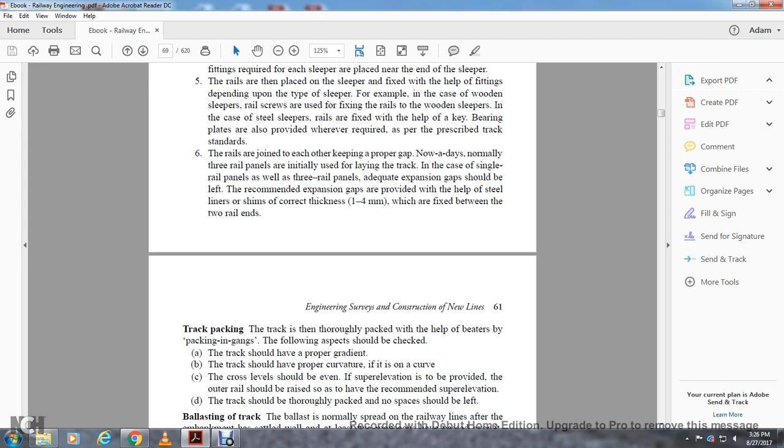The following aspects should be checked. The track should have the proper grade, and the track should have the proper curvature if it's on a curve. The cross level should be even. For super elevation, the outer rail should be raised to have the recommended super elevation. The track should be thoroughly packed. No hollow spaces should be left.

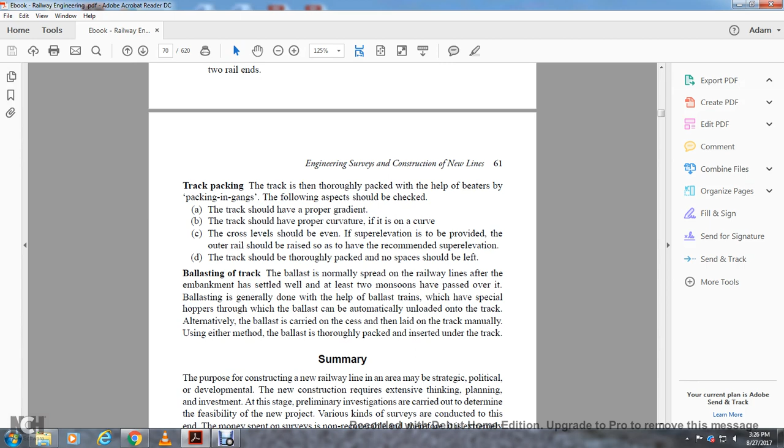Ballasting the track. The ballast is normally spread on the rail lines after the embankment has settled, with at least two monsoons having passed over it. Ballasting is generally done with the help of a ballast train, which has special hoppers through which the ballast can automatically be unloaded on the track. Alternatively, the ballast is carried on the cess and laid on the track manually. Using either method, and the ballast is packed and inserted under the track.

Summary: the purpose of constructing a new railway line may be strategic, political, or development of the area. New construction requires extensive thinking and planning of the investment. A range of preliminary investigations are carried out to determine the feasibility of the new project. Various kinds of surveys are conducted to this end. The money spent on the survey is not recovered. Therefore, it's extremely important to conduct the survey as precisely and thoughtfully as possible. The various types of surveys are carried out using appropriate instruments. The outcome of these surveys is a detailed project report elaborating the work drawings.

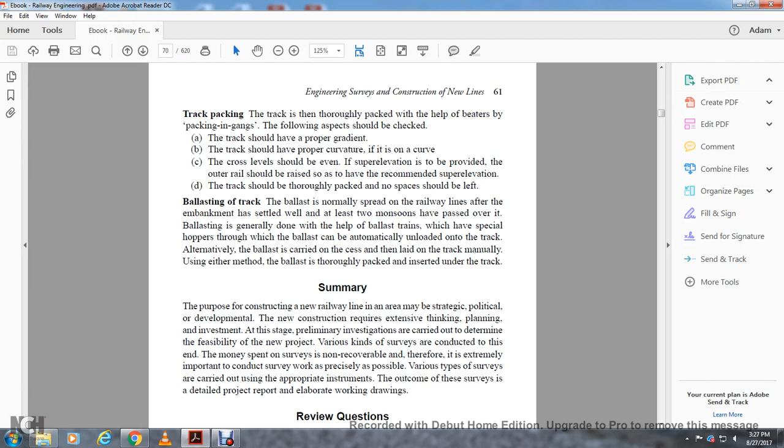And then it goes over some questions. And we're on Chapter 5, Track and Track Stresses.